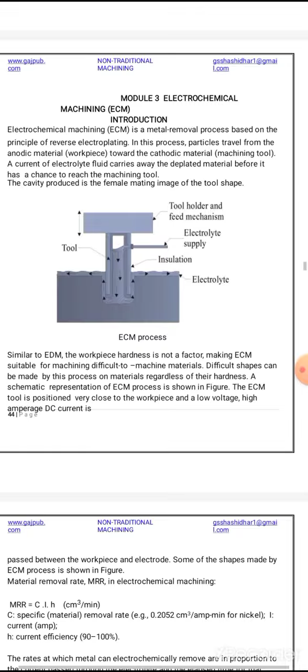Okay. Similar to EDM, the workpiece hardness is not a factor, making ECM suitable for machining difficult to machine materials. Difficult shapes can be made by this process on materials regardless of their hardness. A schematic representation of the ECM process is shown in the figure.

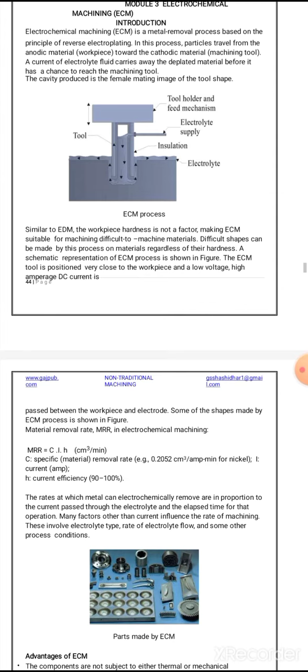The ECM tool is positioned very close to the work surface and a low voltage, high amperage DC current is used. Okay. DC current is used. ECM uses a shaped tool for the electrode. Since the term machining implies the removal of metal from the workpiece, the tool is made the cathode and the workpiece is made the anode.

The electrolyte is pumped through the small gap which is maintained between the tool and workpiece. The chemical properties of this electrolyte are such that the constituents of work material go into the solution by the electrolytic process but do not plate on the tool. By designing the tool accurately, the cavity or hole which is produced exactly reproduces the tool shape. The figure shows the schematic representation of the principle of electrochemical machining, as shown in the diagram.

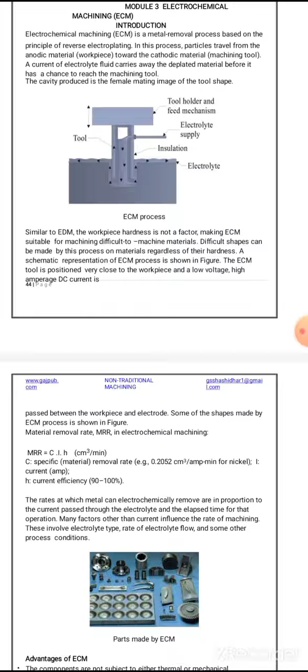Elements of ECM. Elements of the process are the cathode tool, the shape of which is mostly the mirror image of the cavity to be machined into the workpiece. Next, the anode as a workpiece. Third is a source of DC power of sufficient capacity so that high current densities can be maintained between the tool and workpiece. Electrolyte, a conductive liquid, and means to supply it into the gap between the tool and workpiece.

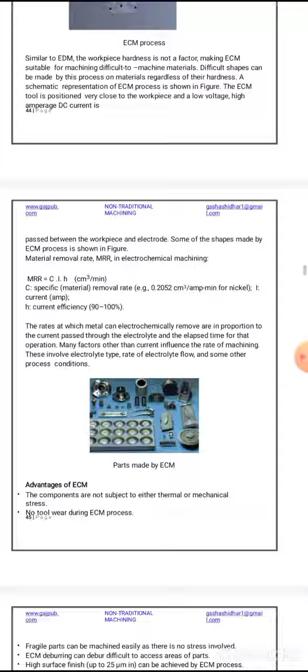Next, cathode tool. The accuracy of the tool shape directly affects the workpiece accuracy, since the configuration of the cavity produced cannot be more accurate than the tool that produces it. The same is applicable to the surface finish of the tool. The poor surface finish of the tool will produce poor surface finish on the part.

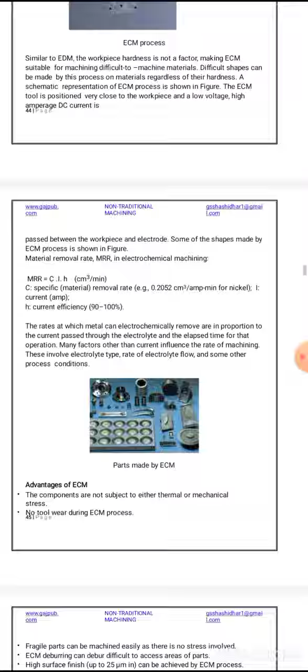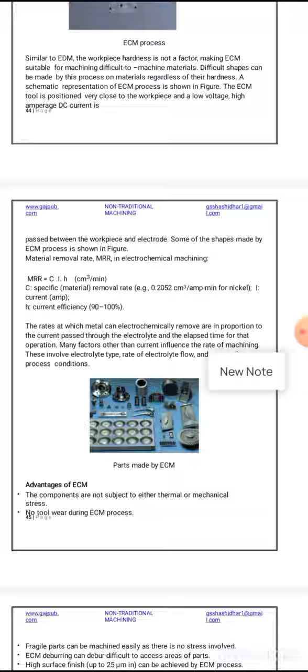The materials that find wide applications in manufacturing of tools for the ECM process are aluminum, brass, copper, carbon, stainless steel, etc. Shaping of the tool is usually not a problem, since all these materials are easy to machine. Cold forging and electroforming are the favorite methods of tool making. Okay.

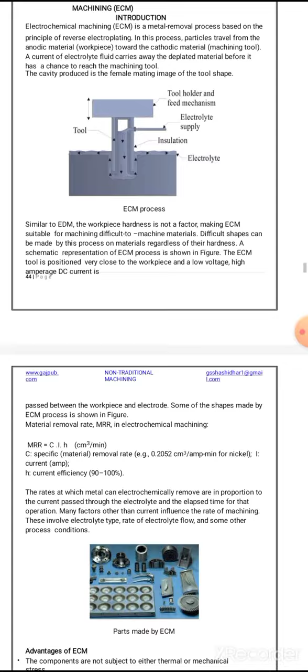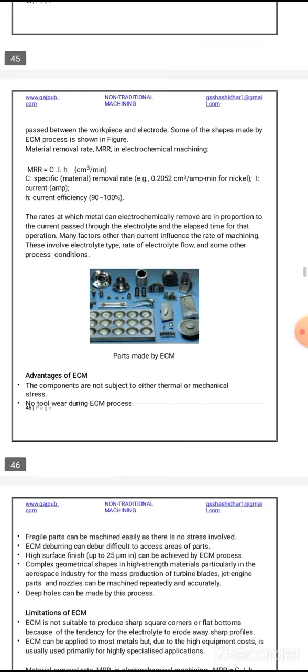And anode workpiece. There is no restriction on the nature of work material, except that it must be a good conductor of electricity. Chemical characteristics of the work surface, however, do affect the material removal rate. Metal removal rate is proportional to the atomic weight of the work material.

Okay, electrolytes. Different electrolytes are going to be used. Electrolyte used in ECM performs many functions, such as completing the electric circuit between the tool and workpiece, allowing desirable machining reactions to occur, carrying away heat generated during the chemical reaction, and carrying away the products of the reaction from the zone of machining. Okay.

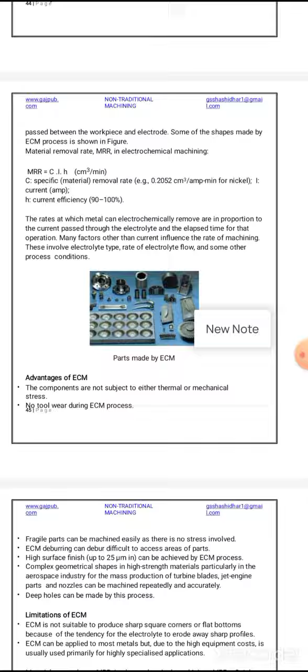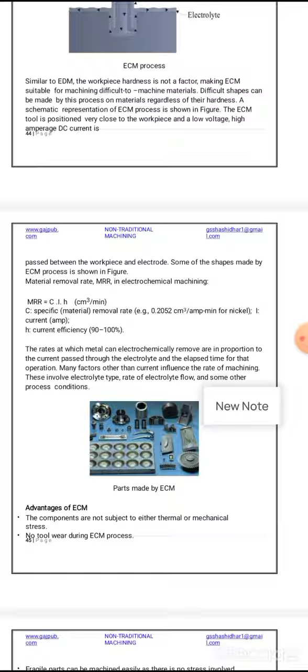The rate at which metal is electrochemically removed is in proportion to the current passed through the electrolyte and the elapsed time for that operation. Many factors other than current influence the rate of machining. These involve electrolyte type, the rate of electrolyte flow, and some other process conditions. Okay, these are the different types of parts which are going to be machined by the electrochemical machining process.

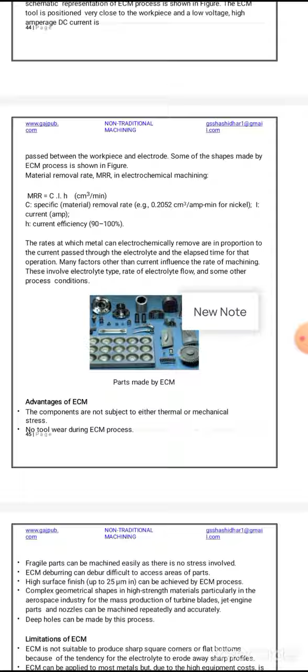Now, advantages of ECM. The components are not subject to either thermal or mechanical stress. Second point, there is no tool wear during the ECM process. Next, fragile parts can be machined easily as there is no stress involved. ECM deburring can deburr difficult to access areas of parts. Next point, high surface finish up to 25 μm can be achieved by the ECM process.

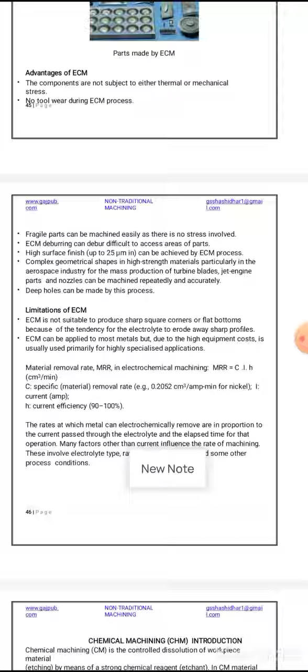Complex geometrical shapes in high strength materials, particularly in the aerospace industry for the mass production of turbine blades, jet engine parts and nozzles, can be machined repeatedly and accurately. Deep holes can be made by this process.

Limitations of ECM. ECM is not suitable for producing sharp square corners and flat bottoms. Note that point. ECM is not suitable for sharp square corners or flat bottoms because of the tendency of the electrolyte to erode away sharp profiles. ECM can be applied to most metals, but due to high equipment cost it is usually used primarily for highly specialized applications.

Okay, material removal rate MRR in electrochemical machining, that is MRR is equal to C I H, where C is the specific material removal rate, I is the current, that is in amperes, and H is the current efficiency, that is 90 to 100%.

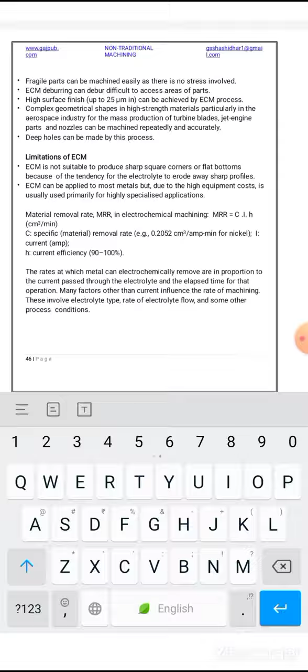The rate at which metal can be electrochemically removed is in proportion to the current passed through the electrolyte and the elapsed time for that operation. Many factors other than current influence the rate of machining. These involve electrolyte type, the rate of electrolyte flow, and some other process conditions. Okay.

Advantages of ECM process. One of the main advantages of ECM lies in its ability to machine complex three-dimensional curved surfaces without the restriction marks left by milling cutters. By preparing one set of cathode tools, say from stainless steel, it is possible to machine many roughly formed components to within close limits of the desired contour. For this reason, gas and steam turbine blades are now machined by this method.

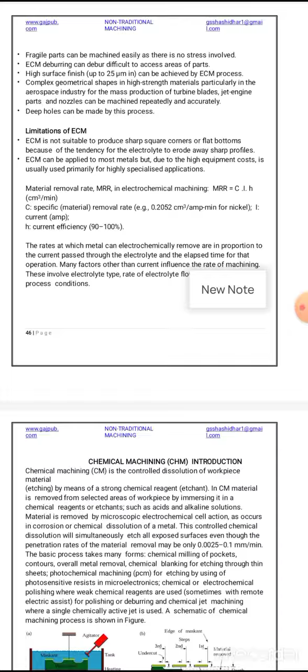The process is capable of machining metals and alloys irrespective of their strength and hardness. Although this advantage is shared with EDM, this process has an added attraction in that the machined surface is stress free and has high surface finish. This characteristic is useful in the sinking of dies in hardened and tempered die blocks. In case of hard materials especially, ECM offers a high rate of metal removal as compared with conventional machining methods.

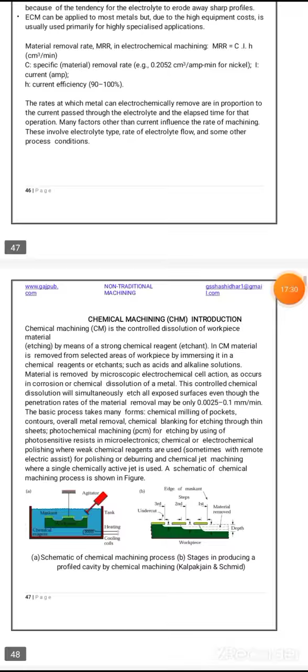Next, applications of ECM. The process can handle a large variety of materials, limited only by their electrochemical properties and not their strength. Metal removal rates are high, especially for high strength, difficult to machine alloys developed for the needs of the space age. The properties which make this process widely applicable are stress free machining and no tool wear, as there is no contact between the tool and workpiece, and no burrs or thermal damage of the workpiece.

Some specific applications of ECM are facing, turning, complex three-dimensional surfaces, die sinking, particularly deep narrow slots, holes, profiling, any odd shape contouring and multiple hole drilling, broaching, deburring, grinding, honing and cutting off.

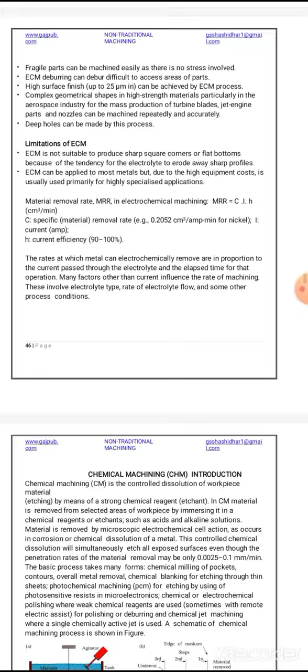Limitations of ECM process. The main limitation of this process is that non-conductive material cannot be machined. Another limitation is machining sharp interior edges and corners because of very high current densities at those points, and blind holes cannot be machined in a solid block in one stage. Simple straightforward shapes can be rapidly produced by conventional machining methods rather than ECM.

The length of components produced with shaped electrodes is restricted to about half a meter. However, improved tooling in the future may overcome this limitation. Corrosion and rust of the ECM machine can be a problem. Space and floor area requirement is also higher than for conventional machining methods. Some additional problems are related to machine tool requirements, such as power supply, electrolyte handling, and the tool feed system.

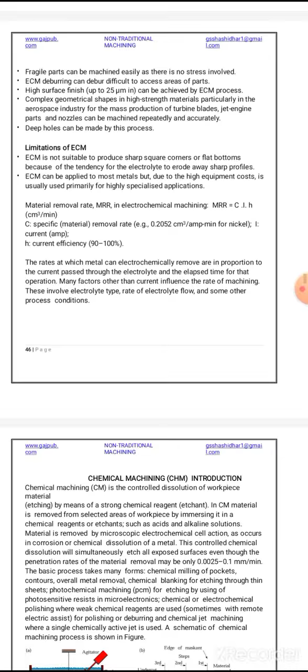Okay, these are the important points on electrochemical machining. I hope you understood, and you should know the different classifications of metal cutting processes, and one of the processes is the ECM process. Okay, understood?